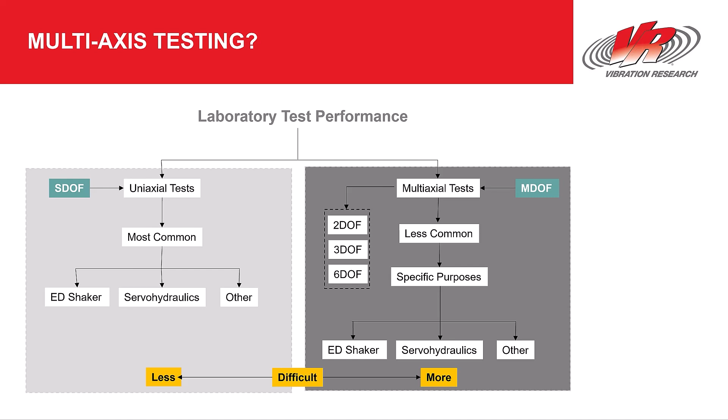And if we go from the left to the right are the more involved, more difficult, more costly multi-axis tests. MDOF, or multiple degrees of freedom, can be two, like a dual axis system, 3 degrees of freedom, so a tri-axis test, and up to 6 DOF, or 6 degrees of freedom. Multi-axis, I mentioned, they're a little bit less common, typically used for a specific purpose, and they are quite a bit more expensive. But again, they can be electro-dynamic, servo-hydraulic, we've seen servo-electric, or other, maybe some mix or a unique shaker setup. These are the types of shaker systems we're talking about, and then we'll talk about some of the capabilities we have for control.

I mentioned that first image we saw was a single axis test, but you can do some multi-axis testing on there. A couple of images here showing how that would be accomplished. If we start left to right, if I have a product where up is not important, so the product does not have to be tested in the orientation in which it is used, in this case it's just an L-shaped fixture. So I've got the product mounted. If you look at the X, it's vertically. I'm testing in the X-axis. Y, so I rotate it. And then Z, I rotate the product, and I have a little clamp fixture holding it down. But I'm testing all 3 axes on a single axis shaker. So that might be one method you're testing 3-axis currently.

Another method could be simultaneous 3-axis. In essence, I've got 3 products on a cube. So if it's the same profile for each axis, you could do it this way. That's going to be the middle image right here. I've got 1 product, 2 products, 3 products. I run the test, and then I can rotate the products around so it sees each of the 3 axes. But I'm running 3 at one time. Again, this one in the middle requires that they're the same profile.

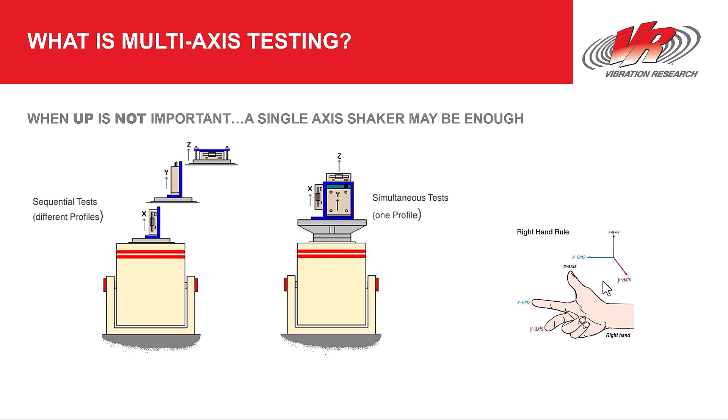And this is just kind of a fun example, but if you're wondering what axis is Z, what's X, what's Y, make the little finger guns, and then stick your middle finger out, perpendicular to your pointer finger. Z is up, X is forward, Y is left to right. Something you can use to impress your fellow lab friends.

But so single axis, okay, if neither of these is a possibility, your product has to be mounted in the orientation in which it's used. A couple other reasons why you would do 3-axis testing too, but this leads us to the multi-axis testing.

And when we're talking like traditional 3-axis testing, you may be wondering why would somebody run these types of tests? They typically are going to be more real world. I have a product out in the field while it's being used. Chances are it's going to be excited in more than one axis at a time. You're getting some in all 3 axes as this product's in use, and you can get a more realistic simulation in the lab.

You also might have a product that has a very specific dynamic response, and you don't see that when you're testing in a single axis alone. And you'll notice it does respond differently when excited in all 3 axes simultaneously. So more real world, that's kind of been the push to 3-axis testing recently. But a couple of other reasons that can be beneficial. Big one's going to be shortening test time.

So if I have a test spec that's 30 hours per axis, that's 30 in X, 30 in Y, 30 in Z for a total of 90 hours. If I can run X, Y, and Z at the same time, all for 30 hours, it cuts my test time down to a third. So there can be a big time savings involved too.

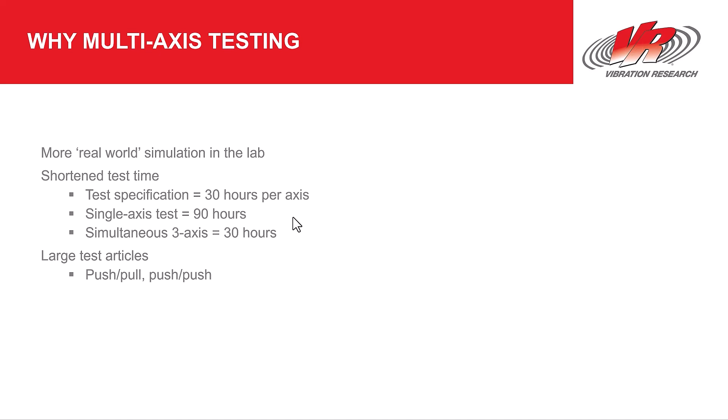Another use could be if you have a very large test article. I've got a couple of images in future slides, but if I have a test article that's very, very big, I need a massive fixture. It may be too big to be driven by one shaker. So we can do something called a push-pull setup or a push-push setup, but this would be 2 shakers driving the same test article, and we'll talk about some of the capabilities here very shortly.

The brief overview, and we've changed the terminology of this recently. Now we're just calling it multiple or multi-loop or loops, and then with or without phase control. Very broad terminology, but this can include anywhere from 2 to 4 shakers, so more than one. And then we can run these loops in phase, we can offset the phase, some pretty unique things that we can do.

Next one will be simultaneous 3-axis, so that traditional 3-axis shaker setup that I showed earlier. And then we have a tripod system or a seismic system. Pretty similar to the simultaneous, there's just one tweak or one additional input that we have to fill into the software.

So to do multi-axis testing, what is required? What is required is the VR10500 vibration controller. This is our latest and greatest hardware model. It can accommodate up to 512 channels, but it's a 16-channel block on each hardware unit. Up to 256 kilohertz sample rate, and up to 4 loops for control for sine, random, shock, and field data replication. And then magnitude and phase control is available in sine and random for all 4 loops.

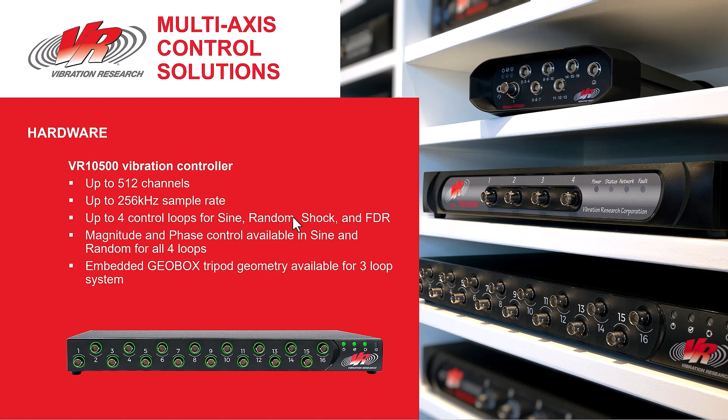If you're an existing customer that may be using our VR9500, and you're running a seismic system, there was something called a geobox. It was an additional piece of hardware that was required to do the geometry of the tripod table. That has been embedded or integrated into the new VR10500 controller, so that piece of equipment is not needed anymore going forward.

I mentioned the 9500 just to be clear. All future development for these multi-loop or multi-axis applications is going to be done for the VR10500. Any new capabilities, any multi-axis applications will be done on the VR10500, and it's actually been that way for the last several years. But the legacy hardware, for lack of a better term, is the 9500.

You have up to 128 channels, 200 kilohertz sample rate, up to 4 control loops for random, shock, and FDR. But it's one drive output per box, and we do not allow for magnitude and phase control between boxes. So that's going to be the big limiting factor on this piece of hardware. So everything I'll talk about from here on out is assuming VR10500.

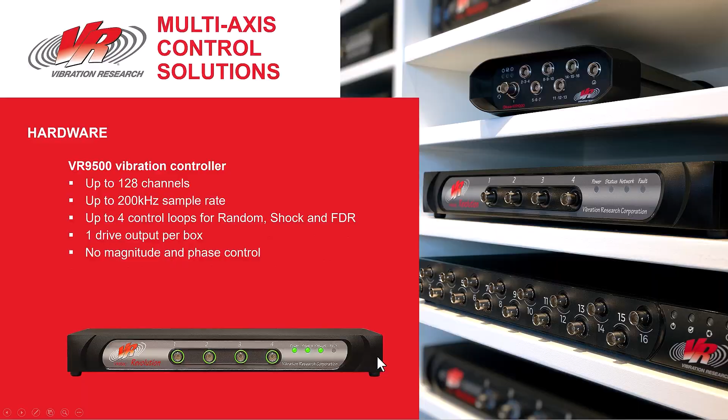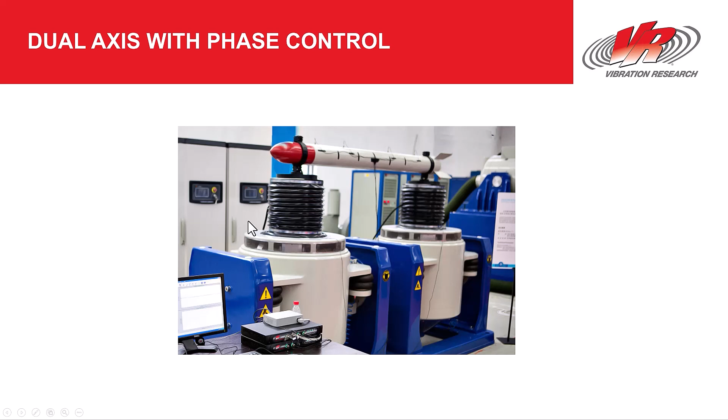You can see we have the 9500. In older versions of the software, it'd be an output from drive and an output from COLA. The second box here was just used for response. So you can see a bunch of accelerometers mounted on the product. With the VR10500, it's just output 1, output 2 to each one of these amplifiers, which drives each shaker independently.

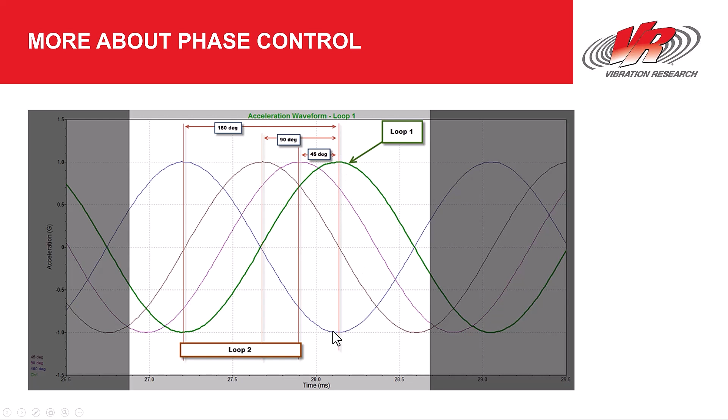And if you want to see that visually, we've got an image here, and this would be your perspective if you're looking straight at 2 shakers. They're in phase. You can see they're at the same position. They're going to be moving up and down at the same time. So they would both hit the top point together and then down, up, down, but they're moving in tandem.

And then if we're at 180 degrees out of phase, you've got shaker 1 at this peak position, shaker 2 is at the bottom, and then they would, in essence, alternate. So if we look at the rocket on here, it would be rocking. So this side is up, this is down, now this is up, this is down, and it would continue to move in that manner. And like I said, you can enter manually any phase value between 0 and 180 degrees, and we'll show you that in VibrationVIEW.

Another setup with this dual axis or multi-loop with phase control would be the push-pull configuration. So this is another setup where I've got a very large fixture. I mount a large product to it, and maybe it's too big to drive with one shaker. So what you do is you mount one shaker here, attach it to the fixture, one shaker here, attach to the fixture, and then you run them 180 degrees out of phase.

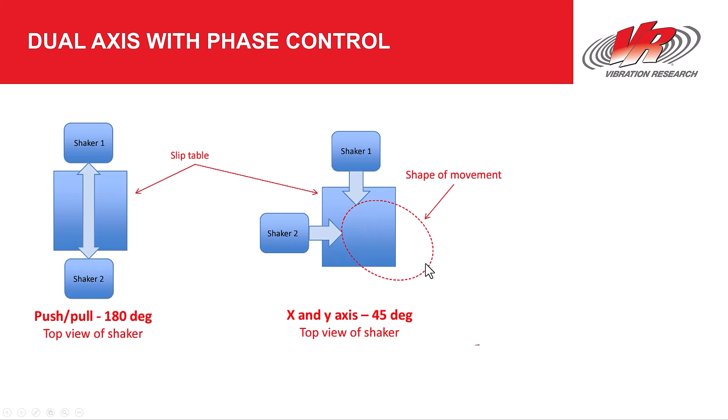We've got the link here to the video. So this is going to be the two loops or dual loop random. And you can see those shakers were moving in tandem. So same thing was happening on each one.

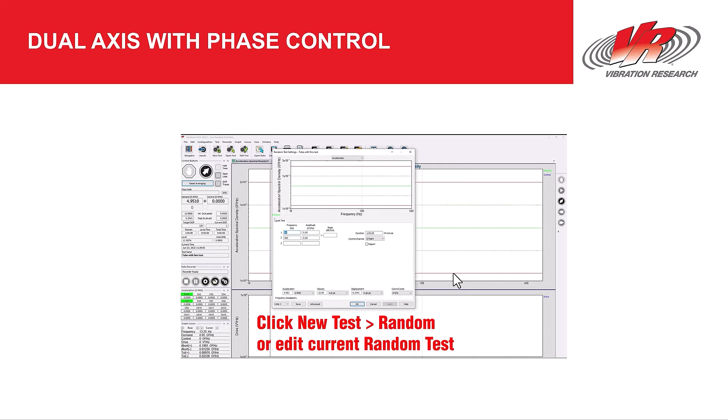Mouse is acting up here.

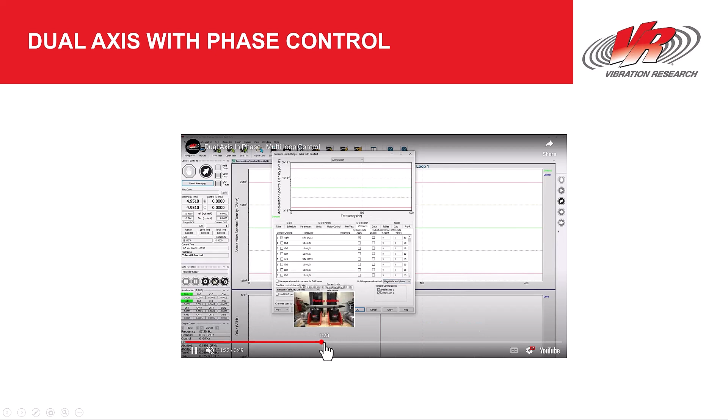Okay. So random. Let's see here. You can see the test running. This video is available on our website too if you want to watch a little bit more.

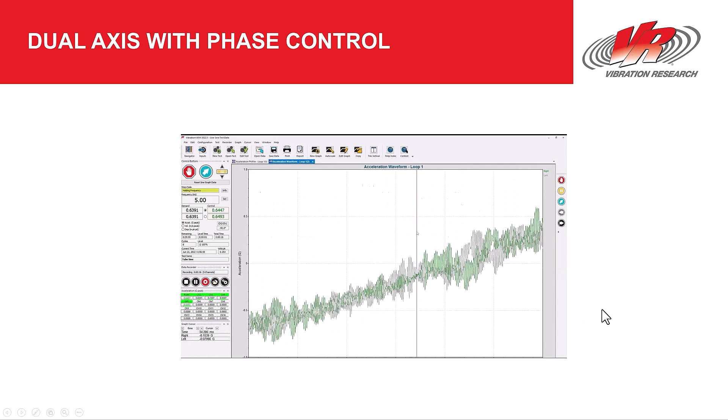We'll show you the sine portion here too right at the end. So we're running these in phase. When I go into the software, I'll show you how you can adjust that. But you can see that missile is moving in tandem, up, down, on both shaker systems.

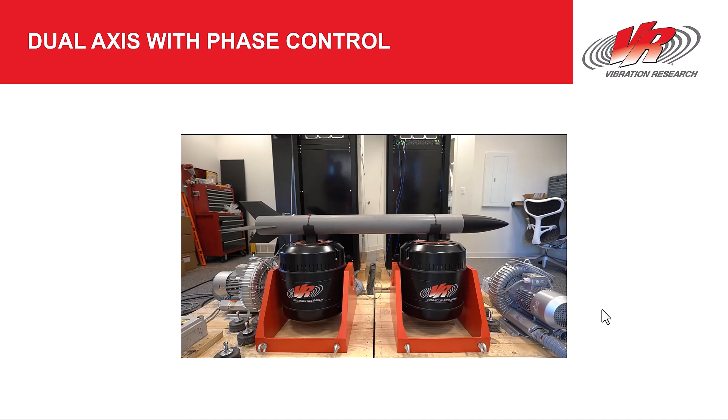Great. So let's switch to last slide, I guess, right here. So this will be the setup with the VR10500. What we have is output number 1, sending the signal to this amplifier. That amplifier is going to drive shaker number 1. And then we have a control sensor connected to channel 1.

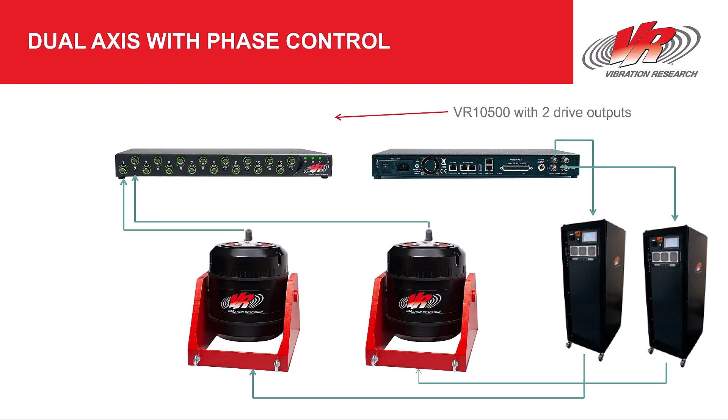And then output number 2 to the second amplifier, driving the second shaker. And we have a control sensor connected to channel 2. For my example, I'm going to be using different channels, but this would be the basic setup for this type of dual loop vibration test. So into VibrationVIEW, let's bring up the software and I can walk through the setup.

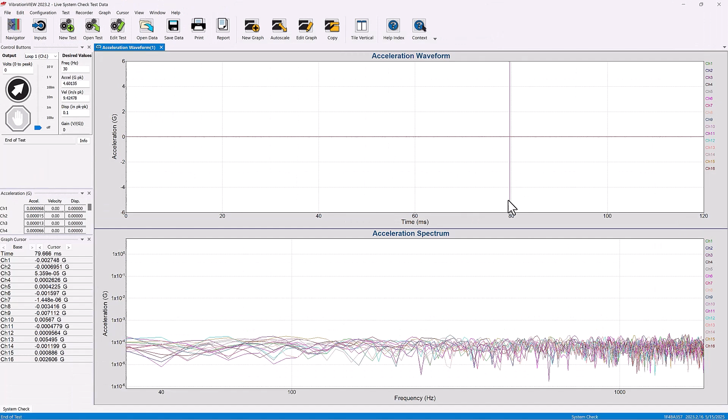All right, so what we have is, this is VibrationVIEW. A couple of housekeeping items here. I'm connected to my VR10500. Inputs, I'm just looping back the controller on itself. But the other piece is the limits. So if you've watched any of our other webinars, we talk about how important it is to set up the shaker limits appropriately. In this case, my example is I have 2 shaker systems.

You'll notice we only input 1 shaker limit. We assume you're running identical shakers. Most oftentimes that's how it works. But we do allow you to select one shaker, and those limits will apply to both loops in this test. So I've just got our VR4600 shaker. That's the one I showed in the video. We'll leave it here for this presentation.

So good enough. And then system check does work as well. So if we want to set it up, I've got loop 1. We should see channel 1. Here, let's remove a couple of the channels on this graph. I have loop 1 is controlling on channel 1. Loop 2 is controlling on channel 5. Loop 3 is controlling on channel 9.

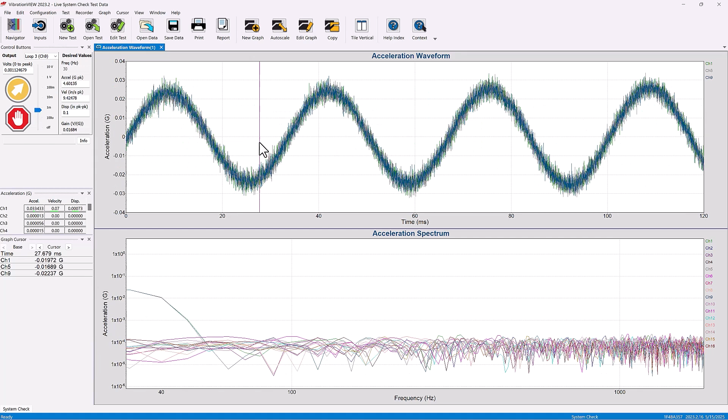So we've got loop 1 is good. I can do loop 2. All right. And loop 3. Let's just make sure we're seeing a response here. Beautiful. All right, so I've got my system set up appropriately. Let's double check one thing here a minute. Good to go. All right.

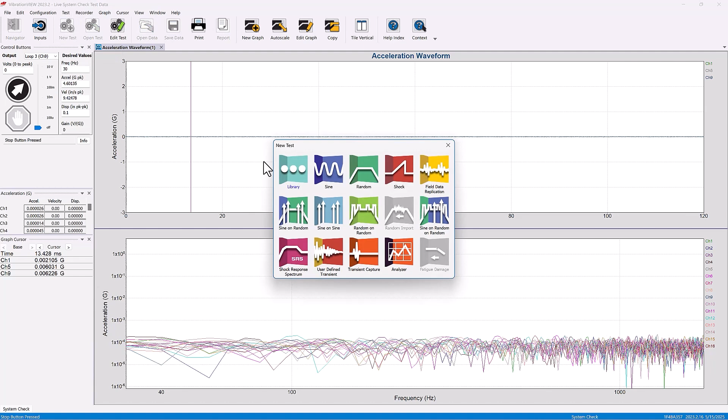So for this first test, what we're going to do is set up a sine test. So new test, sine. And the profile in this case isn't super important. I'm just going to set up a sine sweep from 30 to 1,000 hertz. And we'll just input 100 sweeps just so we let it run for a while. We will not complete that for the webinar.

But now I can walk you through the setup. And you'll notice the software is the same as what you're used to for running single axis vibe tests.

Having mouse problems here today. All right, there we go.

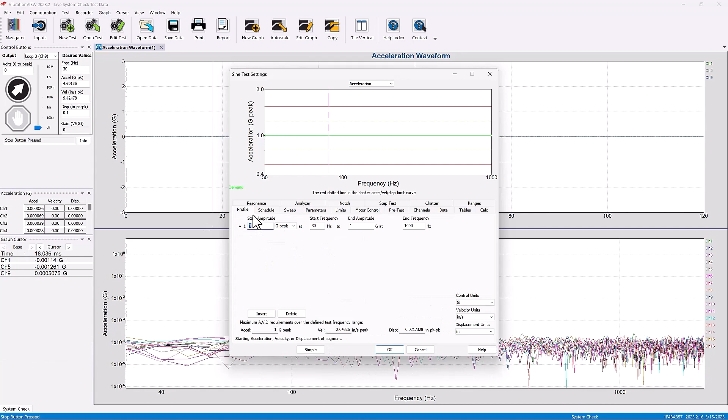So I'm going into advanced test, and by default we're running a single loop or a single output, controlling on channel 1. You can always adjust that. But what I need to do in this case is enable loop 2. So loop 2, by default we check channel 5, but this could be any other channel. That's going to be my control channel for output number 2.

So that's your big step there. You can enable a couple of different control methods. We have by default magnitude and phase. Again, that's only possible on the 10500.

Magnitude only, and then we also have equal outputs, and that's essentially doing a T to the drive. So same signals going to each one of those shakers. Got a good document in the help file. If you want any additional information, click help, and we give you definitions for all of those. But just know there's several different control schemes that you can use for these multi-axis tests.

So loop 1, loop 2. The requirement for this, the dual loop with phase control, is it's the same profile for each loop. On the lower left of this screen, you can see there's loop 2. That's the profile I'm looking at now. Loop 1, same profile, but I can look at each loop individually. That's going to be the key here. So what's my profile, or what's my schedule? I'm running this 100 times.

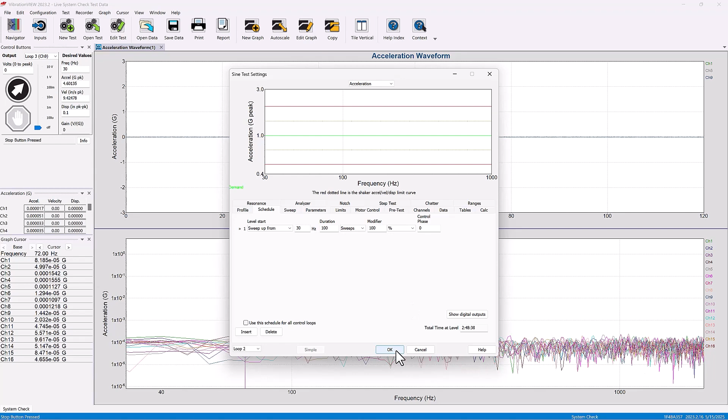If I look at loop 2, this is where it gives me the ability to enter a phase value. When we start, I'll just run this test and I'll have the phase be 0. So they'll be doing the same thing to start. And then we'll come in and we'll change this and actually do an offset, and you can see how that works or how it looks. So we'll call it MA Sine Webinar. Oops. So save the profile and hit run.

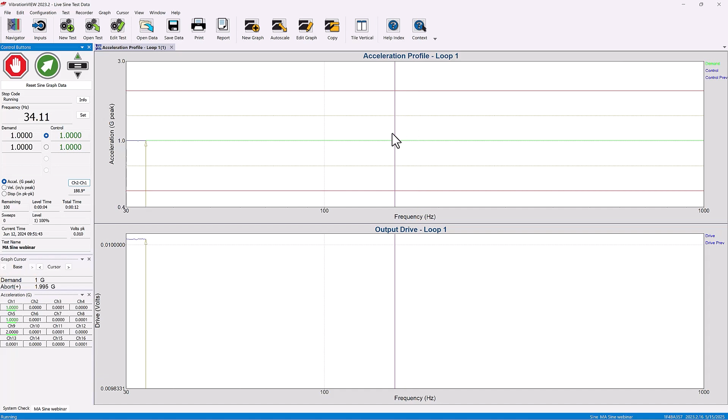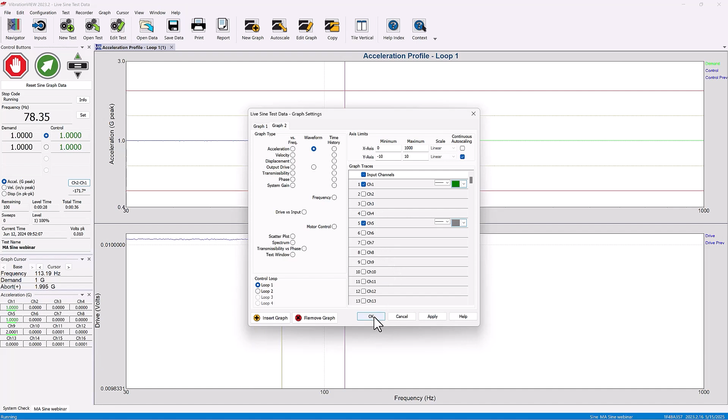So a couple things that you'll see. I have a demand for each control loop. You'll notice they're the same because they are the same profile. I have the acceleration profile here. Excuse me. Top graph is acceleration versus frequency, that's fine. Let's say I want to look at the waveform on channel 1, so that's my control channel for loop number 1. I also want to look at the waveform on channel 5, that's my waveform for my second control channel.

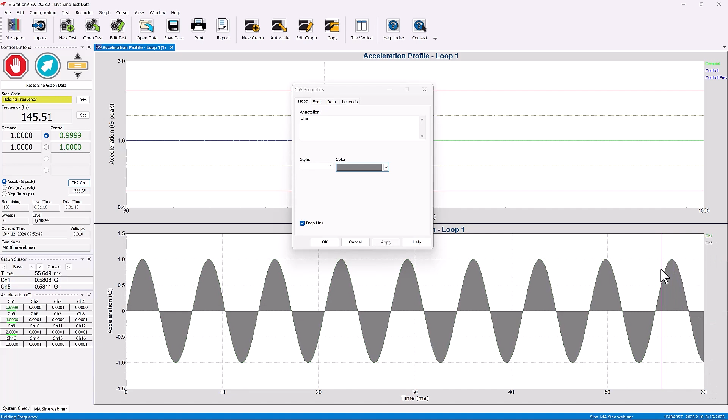We're looking to have it in phase, so you'll see basically it looks like one time waveform on this bottom graph, but if I click them, you can see they're overlaying on top of each other. Let's just pause this a minute. To show that you have two traces there, if you double click one of these channels in the legend, you can use the drop line. And what that's doing is filling in essentially the area under the trace. So channel 5, I'm seeing that. Channel 1 is basically right over top of it. So we do have two time signals there that we are seeing.

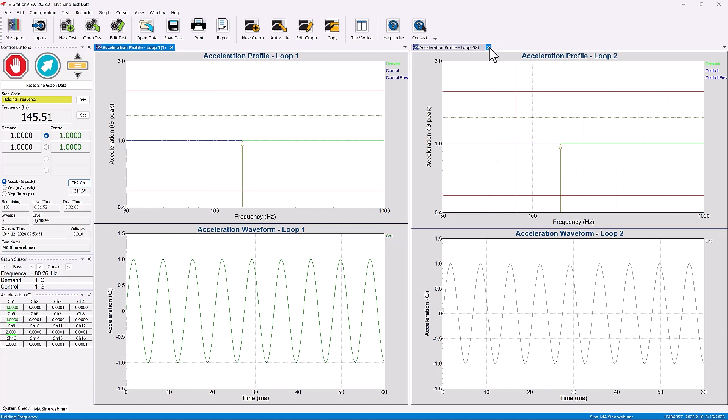You can also add multiple graphs, show you how to update that. So if I want to see loop 2, this same graph, and then I hit insert, now I have graph 2, and then I want to see the waveform on channel 5, I can do that. To arrange them nicely, if I hit tile vertical, now I can see loop 1, loop 2, and I could see these two acceleration waveforms, just channel 1, channel 5. Looks great. Let me re-add channel 5 here. Graph traces, so I just right-click the graph and I can do it this way.

But then if I hit edit test, go to my schedule. Oh, where's my phase value? Don't see it. Yep, that's on loop 2, so I have to look at loop 2. If we want to do a 45-degree phase, look at the bottom graph. You'll see now we're controlling to 45 degrees. So channel 1, channel 5.

I'm going to drag up and release. Oh. All right, mouse. So click here, drag it up, and drop it. I apologize, the mouse here is not working real well. Might have to take my word for it.

So what I'm doing is dragging, there we go, and dropping. And I'll just call this one 45. So I made a static trace, but just to show you, we're basically duplicating the graph that we looked at in the slides. All right, so if we hit OK, now let's say I want to do 90, hit apply, watch that bottom graph. So there we go, now we're controlling to a 90-degree phase value. Drag it.

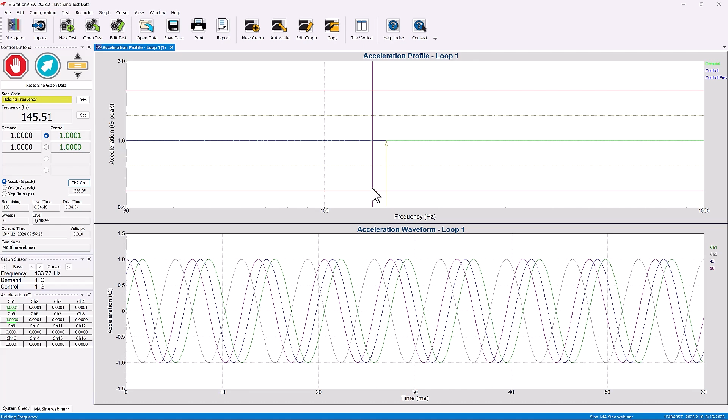So biggest thing there, we want to make sure we're enabling loop 2, we're choosing the appropriate control channel, and then also system limits. And then for our schedule, you have the ability to enter the phase value when you're looking at loop 2. You don't have that phase option in random or shock. It is available in sine.

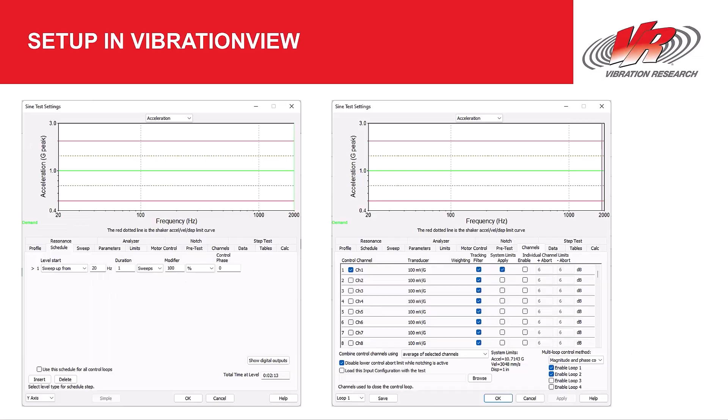So first example, dual loop, multi-loop with phase control. We have some additional information in those slides. You can download a copy of them if you want to follow along or see some additional info. But that is the first example. So I've got some screenshots there.

Second example, this would be the, we'll call it more traditional 3-axis, or what you probably think of when you hear 3-axis vibration testing. So 3-axis simultaneously, I have in this case 1 shaker driving vertically, and then the other 2 are driving in the X and Y axes. So the key to these setups too is going to be the head expander, like bearing assembly, because you have to allow for motion in all 3 of these axes at the same time.

That is a bit of a science, not the purpose of this presentation either. Some of the shaker guys could probably talk to you for a very long time on how you tune a shaker like this, or some of the mechanics involved. But for us, we're just sticking to the control. But yeah, this is what we're talking about in this case, 3 axes simultaneously. For this application, we can run different profiles for each axis. So I can run 1 profile in Z, 1 in X, 1 in Y. They do not have to be the same.

But the key is to minimize the effect that, let's say, driving in the Z axis has on the Y axis or on the X axis, and then vice versa. You want to minimize the effect that driving it in this axis has on the other 2. And that is the key to a system like this, and that's what makes it very, very difficult.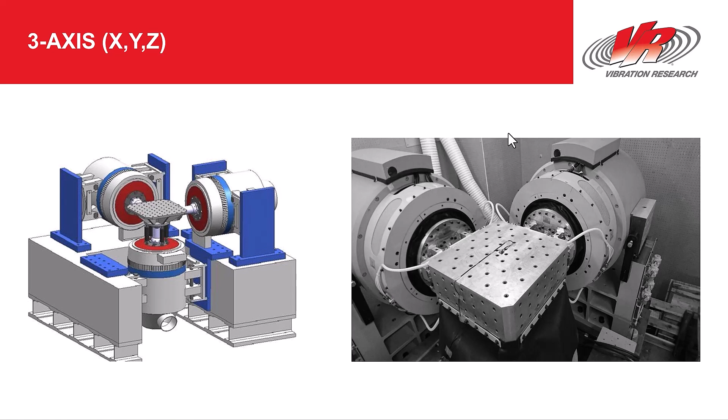But yeah, so for this type of application, typical use cases: random, FDR, so field data replication or running time histories, and then earthquake, pyroshock. Typically that is SRS or UDT, we call user-defined transient. The setup for the seismic system or the tripod is very similar to what I'm showing you here, aside from 1 additional entry field, and I'll talk about that briefly next.

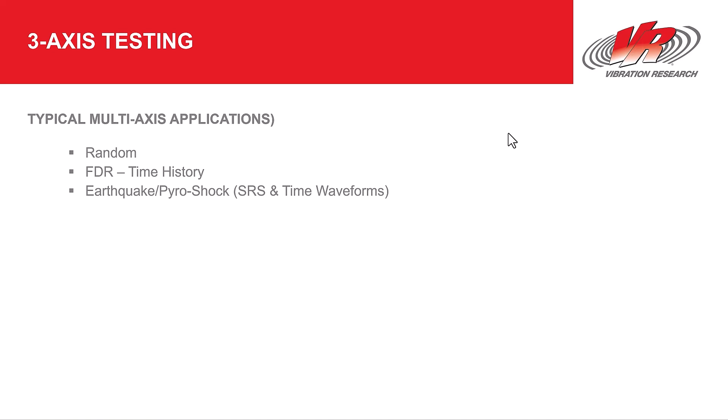So, 1 specific 3-axis specification, MIL-STD-810H, method 527. So it calls for multi-exciter testing or multiple axis MIMO. Includes time histories, random, also recording. A recorder view is what we call that.

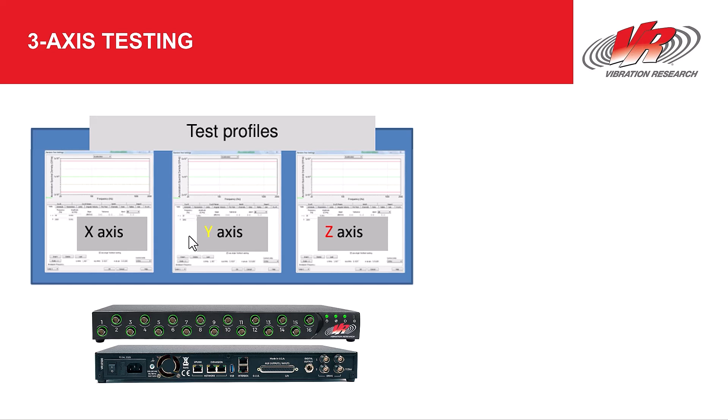Setup in VibrationVIEW is with the 10500. You've got 3 outputs, so let's call it Z, X, Y. And then we enter specific profiles for each axis, and again, pick a control channel for each output. And this is something like we can expect to see. We will set this up within VibrationVIEW now.

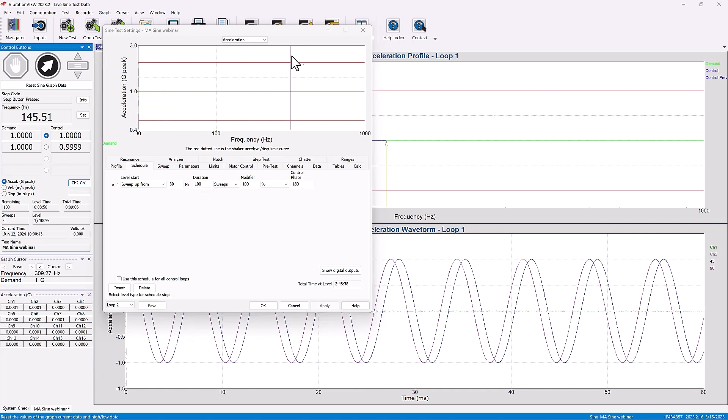All right, so let's stop this sine test here a minute and go into new test and random. Setup is pretty similar between this test mode and sine as far as the loops. I mentioned this is a 3-loop or a multi-axis random test. To set that one up, we'll go in, hit advanced again, and then go to the channels tab.

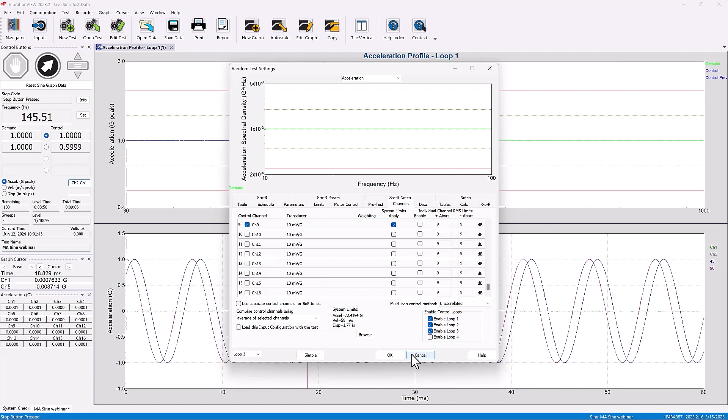So same process. Oh, I am going to change one thing that you'd probably find useful in this test mode. Let's just hit enable loop 2 and enable loop 3. Testing my patience here. All right, there we go. So enable loop 2, enable loop 3. I'm just going to hit OK, and I'll come right back to it. But I want to make this a little bit easier to understand. So multi-axis random webinar. Good.

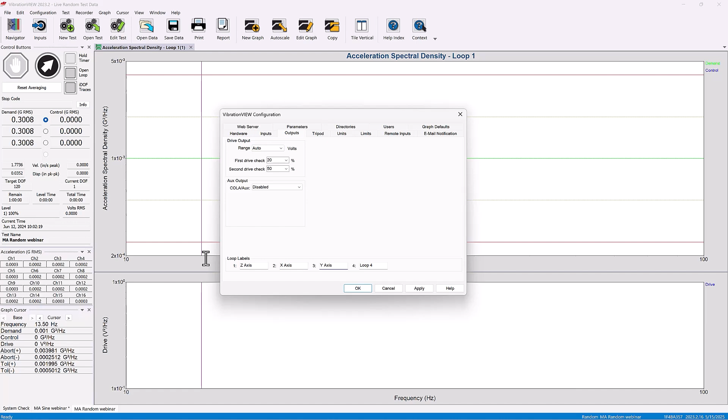So you can change the names of these loops or of these outputs. And if I go to config and outputs, okay, you can edit the name. So if I say z-axis, x-axis, y-axis, we'll now see this as opposed to loop 1, loop 2, loop 3. That makes a little bit more sense in your dual loop, or that first example we talked about. But so from here, advanced, go in and go to the channels tab again.

I've enabled Z, X, Y, and same process here. So my Z-axis, channel 1 is used for control, my X-axis, channel 5, and my Y is channel 9. And I have 3 BNC cables looped, so from drive output 1 to channel 1, 2 to channel 5, 3 to channel 9.

And then we have a couple different control options here for 3-axis or multi-axis random. Equal outputs, again, is basically T in the output, and then magnitude control only, magnitude and phase, and then uncorrelated is independent. That's what it used to be called in the older versions of software. And then from here, same process as you're used to for running a single axis random test, or pretty similar to what I just showed you. We have the ability to enter profiles, and I mentioned these can be different for different axes too.

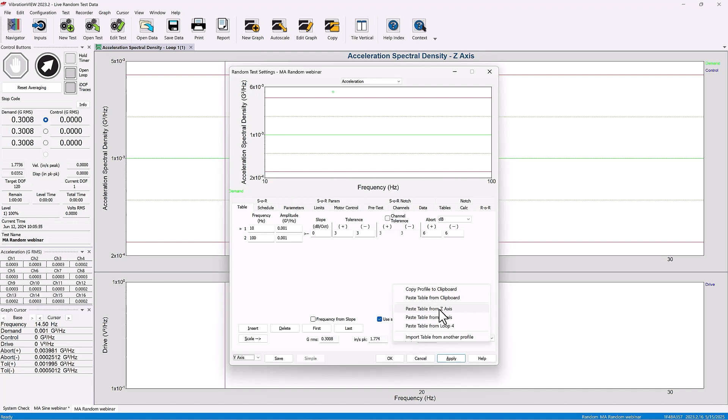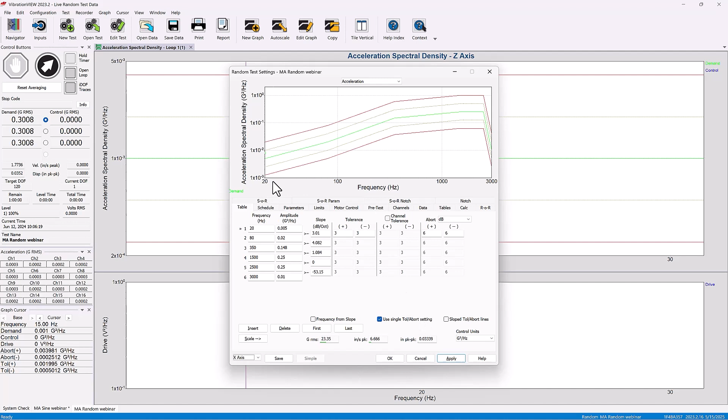And then rather than just taking the breakpoint table I have from Excel, another thing that you can do, let's say my Z and Y are the same profile, for example. I can right click in here and just say, okay, paste that table from my Z axis, and here it is. So now I have separate profiles. There's my Y. There's my Z, which is identical, and then I have my X. So 3 individual profiles, and I am ready to run. So what do I have? Just run for an hour. Beautiful. We're good to go.

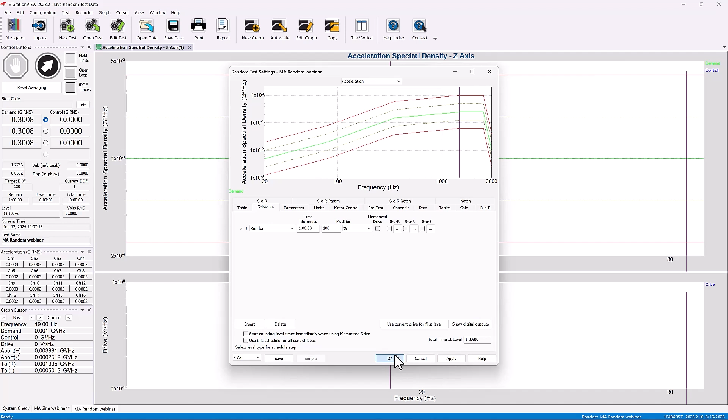So I mentioned before the trick of this multi-axis or 3-axis random testing simultaneously. You want to minimize the effects that driving in Z has on X and Y axes. We can do that with what's called notching. That's a subject for another webinar, but you can basically say, okay, I want to notch a frequency that is impacting the other axes. I want to notch it in the Z-axis to minimize the effects on X and Y, and you would do that on the notching tab. Again, basic webinar here today to go through the functionality, but that is another feature if you're running this type of test that would probably be useful to learn a little bit more about.

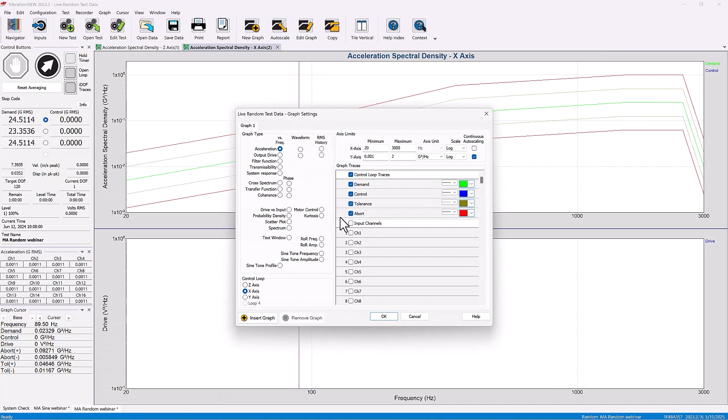All right, so I have my acceleration, so the PSD graph, and then I have the drive signal for Z. If I want to add a new graph, let's do my X. Same graphs. And then I think I was doing the output drive. Good, good. And then I'm also going to do the Y-axis and the output drive for that same axis. Tile vertically. Now I can see 1, 2, 3, or Z, X, and Y.

I hit run, and we'll see each of these 3 axes coming up to level. You can also get a quick snapshot to the left, so my demand, and then what is the control. And we're bringing these into tolerance. So again, controlling all 3 axes, we got Z, X, Y.

Let me take a look here, make sure I got the right channels. So Z should be channel 1 for control. Get rid of you.

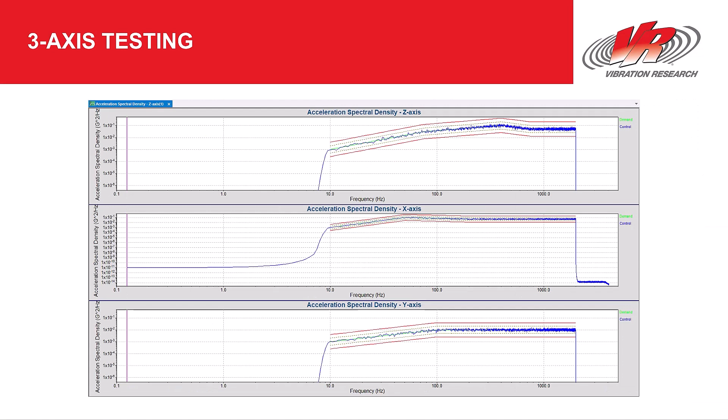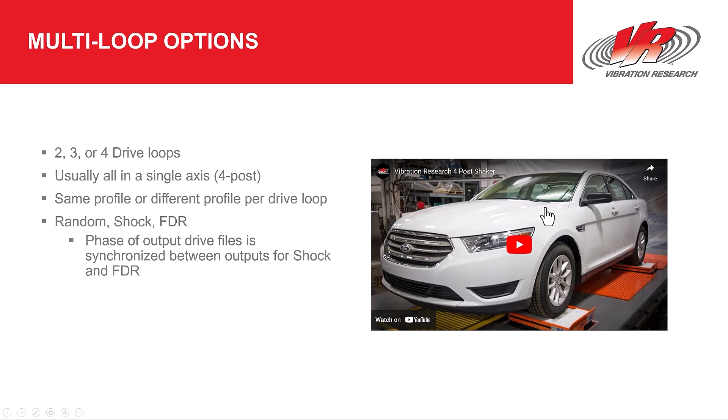Good. All right. So the third one is going to be, again, we call this multi-loop. If you think of like a 4-poster, if you've seen one of these in the past, think of it as one actuator or one loop, another actuator, another loop. We've got one loop or one actuator on each wheel in this example.

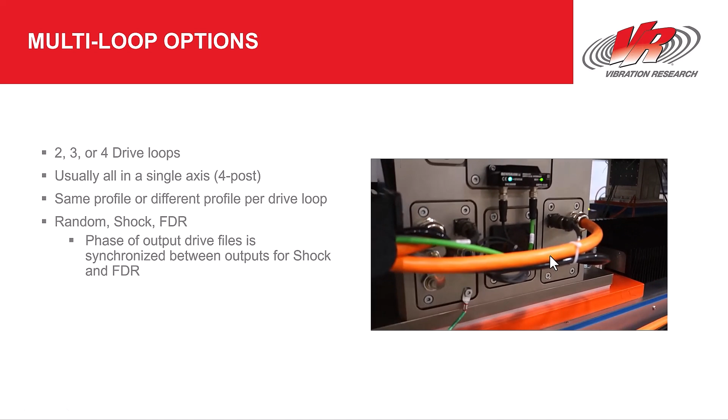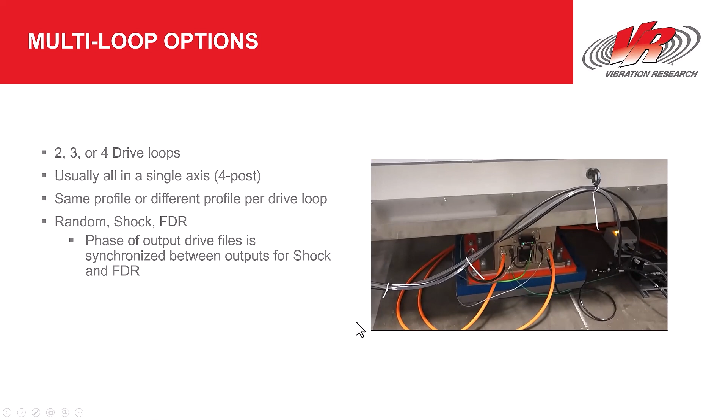We'll play through this briefly, but what we did is recorded time histories, and we had accelerometers on each wheel. And then what we're doing is replaying a time history file to each actuator. So in this example, a vehicle, if it was driving over a speed bump, I would have the recordings started at the same time. If we replayed it on this 4-post system and hit start, you'd see the front wheels go up and over a speed bump, and then with a delay the back wheels would go up and down like it's going over a speed bump.

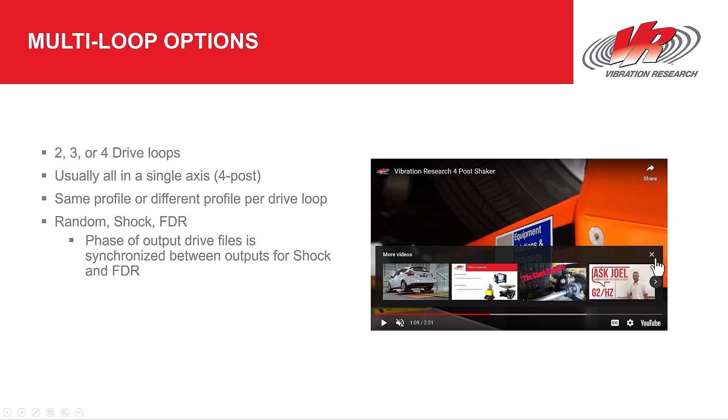This is typically done in a single axis. So in this example, it's like a 4-post system. I've got 1, 2, 3, 4, but it can be 2, it can be 3, or it can be 4, and they can also be in different axes. They don't have to be only vertical, for example. But you can run the same profile or different profiles per loop.

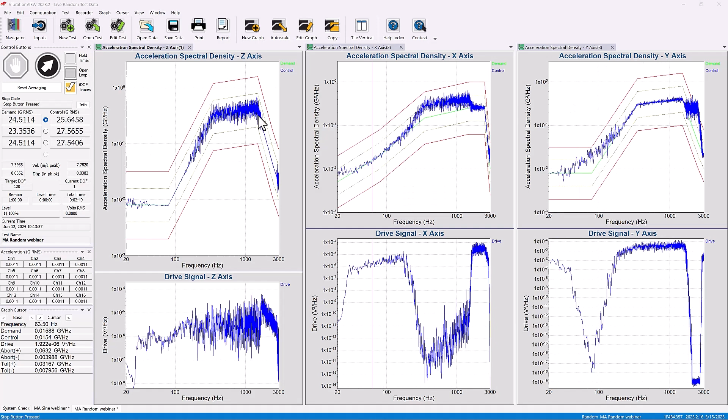And then for random, shock, and FDR, the phase output drive files are synchronized between the outputs for shock and FDR. So I hit run, it's going to start all 4 of those at the same time. So in that speed bump example, you would see the front 2 wheels going over and then the back 2 wheels. Setup for this is not a whole lot different. Again, same process. There are a couple gotchas that I'll show you quickly. And I only have 3 outputs set up, so we'll do a tricycle 3-post system.

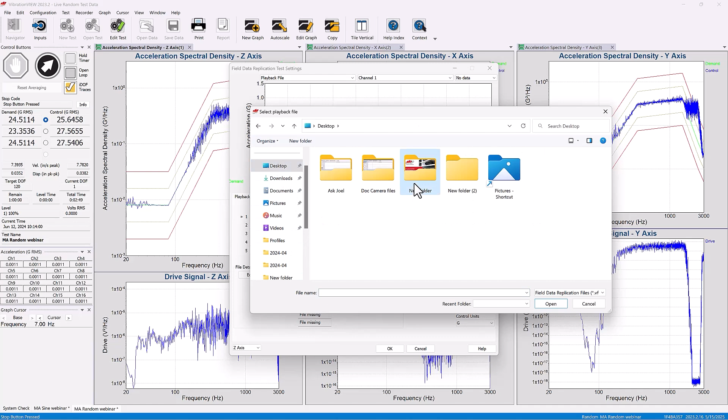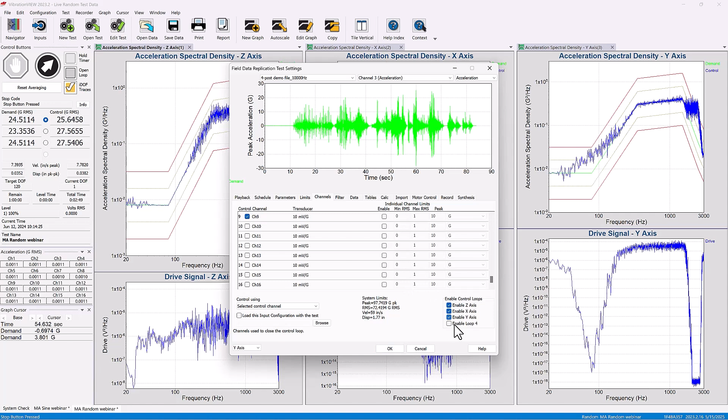But what you do, you go in here, and I have a file. Where did I save it? Saved it in here. So I've got a file that has 4 time history files. So let's say for this example, that's the front wheel of the tricycle. This is back left. This is back right. The 4th one we'll pretend isn't there. But what I've done is I brought in the file. I'm going to go to my channels tab again and enable these. I'm going to hit OK, FDR webinar.

I'm going to rechange those names too, just because it makes a little bit more sense if we're talking a 3-poster. So we'll say loop 1, loop 2, and loop 3 as opposed to X, Y, and Z. But channels, so we go in, we have to again enable loop 1, choose my control channel, so this is channel 5, loop 3, channel 9. I have those set up appropriately.

Once these loops are enabled, we can go to the playback tab and now choose what channel we want for each loop. So I mentioned I've got 4 channels. We just selected the demand channel for this loop. So loop 1 will be channel 1. If I go to loop 2, I will look at this, so channel 2 from my time history. And then I go to loop 3, and I want that to be channel 3 from my time history.

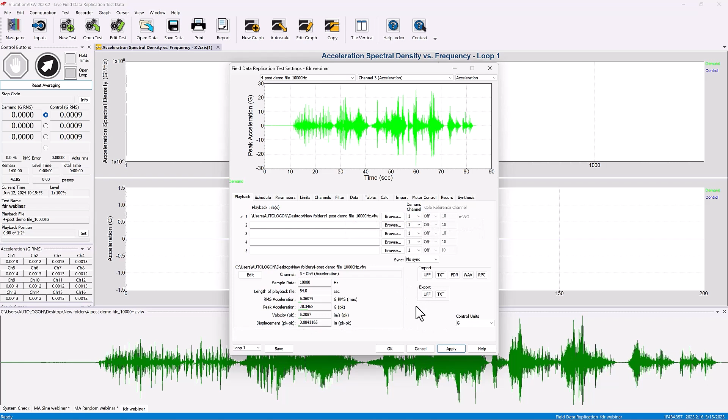So loop 3, loop 2 you'll see, and then loop 1 is channel 1. So those are all set up properly. They're ready to go. And now I can just hit OK, and I'm ready to run. So we'll again add, I have loop 1. Let's do, I want to look at loop 2 versus frequency. Oh, whoops. New graph. So I want loop 2.

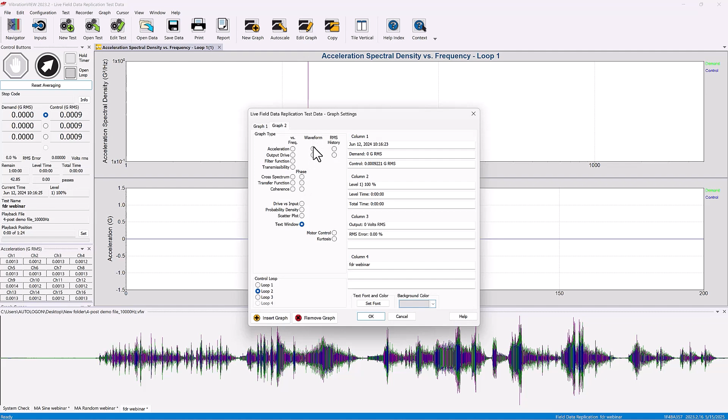It should be what channel? Well, I got control on there. And then let's do our waveform for loop 2. And we'll do the same thing for loop 3. So I want that and that. And then tile vertical again. And I'm ready to go. So loop 1, loop 2, loop 3.

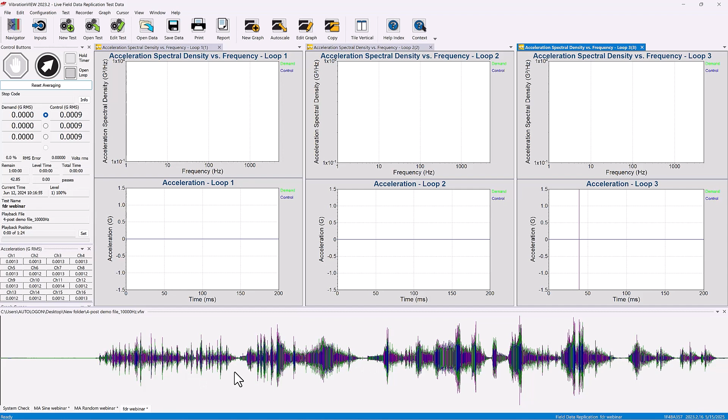Within the last version or two of software, we also included the time history, basically the whole graph view. So now we can see where we're at in this time history file. In older versions of software, you were limited to this small time window. So in this case, 200 milliseconds, you couldn't see exactly where you were.

But we are controlling each of these 3 loops independently. You can see how we're doing, along with the time waveform, and then where we're at. You do have the same filter ability here, or the notching ability, as you have in single axis FDR. So if we're on loop 1, this waveform, you can apply a notch live. Let's say we want to notch out 100 to 300 hertz. You can see what happens right here on this waveform. We'll be notching out 100 to 300, and again, you can do this live.

Yeah, so our tricycle 3-post system running a time history file using field data replication. Same process: enable the channels or enable the loops, choose the control channel. The big thing in FDR is you have to have the individual channels in the same time history, and then select your demand channel on each control loop.

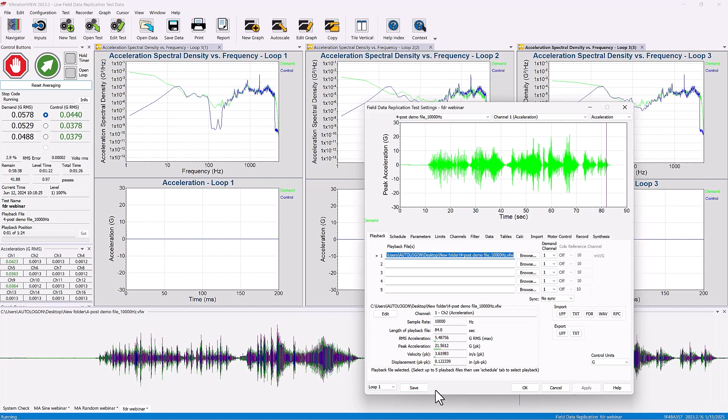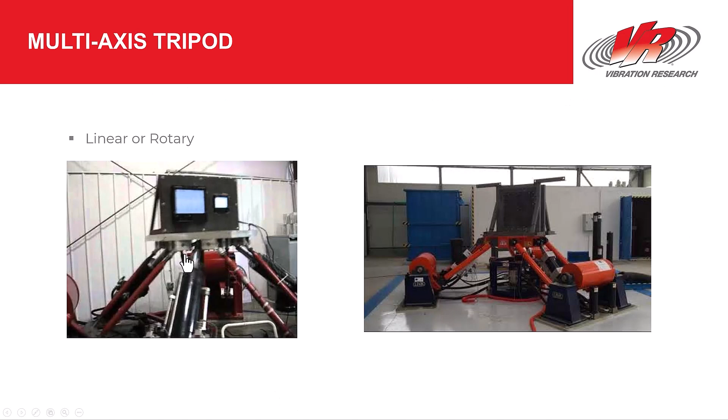We will address them. But with that, we are on to the last multi-axis control. And this one is going to be brief. This is a seismic system or earthquake or a tripod, a lot of different terms for the same type of test. But we've got a couple examples. So this is a control panel for a nuclear facility or a display. You'll notice it is 3-axis simultaneously.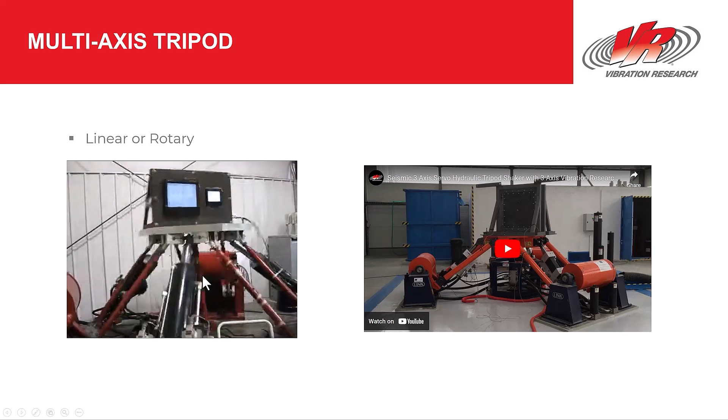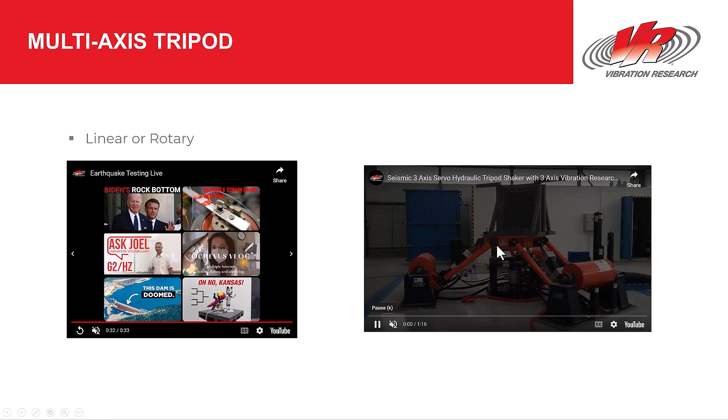In the past, we had a separate hardware unit called the GeoBox that did the table geometry calculations. We've integrated that into the 10500, so you don't need that GeoBox anymore. But we can control 3 axes. Typically, these tables are designed to test in 3 axes, so X, Y, Z, and can constrain the pitch, roll, and yaw directions. But that's pretty extreme. This is a little more subdued test, but same concept. And we have the ability to enter either a linear or rotary seismic system or a tripod system.

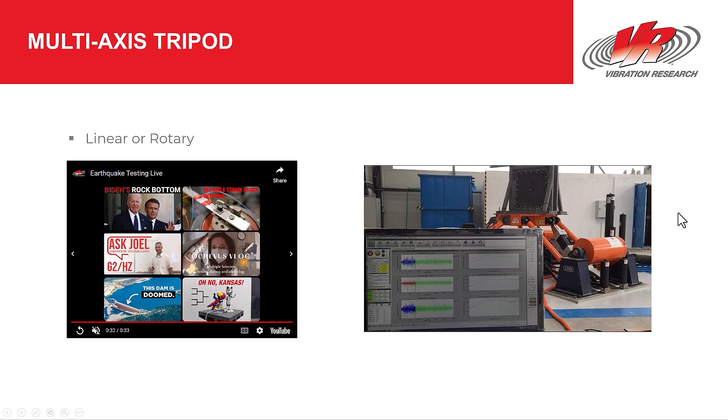So another example here. Typical use cases, IEEE earthquake tests. But like I said, typically set up to constrain the pitch, roll, and yaw. Transient software, UDT is what we call it, user-defined transient, plus the IEEE package would be required. You can do this with a single 10.5 now, and then sine, random, FDR are also available.

One controller can be used to drive either the X, Y, or Z alone. So you can swap drive cables and say, okay, I just want to run Z sine, X sine, Y sine. You're swapping the drive cable. You can do that with one instance of the software.

The only addition to run a tripod system is under the global configurations. This I think was my mistake for my 3-axis random. I had the tripod output selected, so I think that was screwing me up. I was going over the webinar yesterday and forgot to disable this. But you go to this tripod field here, and disabled is what I should have had. You can select either a linear or a rotary system, and then you enter the parameters of your system.

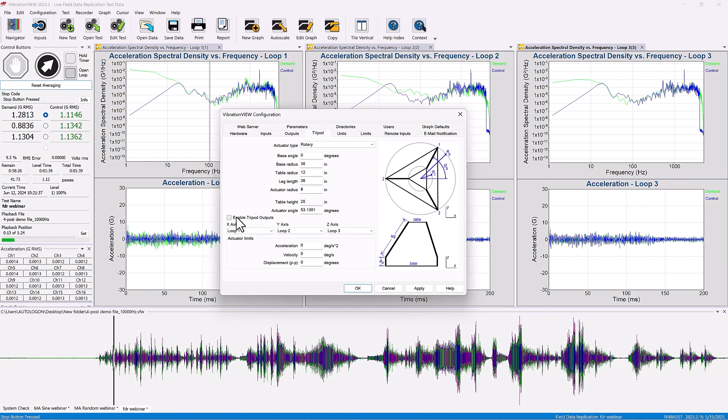So you've got base angle, base and table radius, leg length, actuator radius, table height. So you enter these. That allows us to do the table geometry, and then you will also enable the tripod outputs. And then from here, you've got acceleration, velocity, displacement, enter those. And then the process is the exact same as what we did for the simultaneous 3-axis.

So for SRS, this is a lot of the earthquake testing. You do the same process of enabling your channels. You calculate or enter your breakpoints, set up the waveform for loop 1. Same process here. Let's do loop 2. Synthesize, iterate. So again, setting up your waveform. Same process for schedule. How many pulses do you want to run? And then again, hit run. These will all run in tandem. So I hit run once. We output loop 1, loop 2, loop 3, or X, Y, Z at the same time.

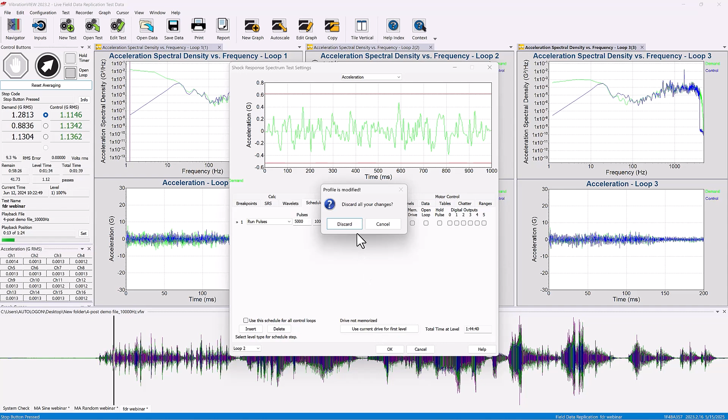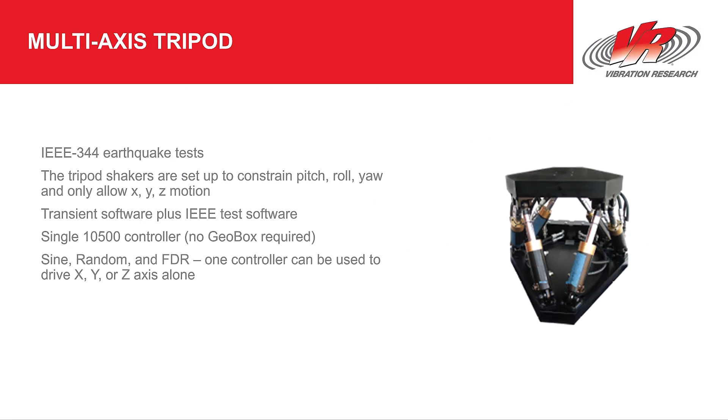If not, hopefully everyone learned a little bit more about 3-axis testing and some of the capabilities that VR offers.